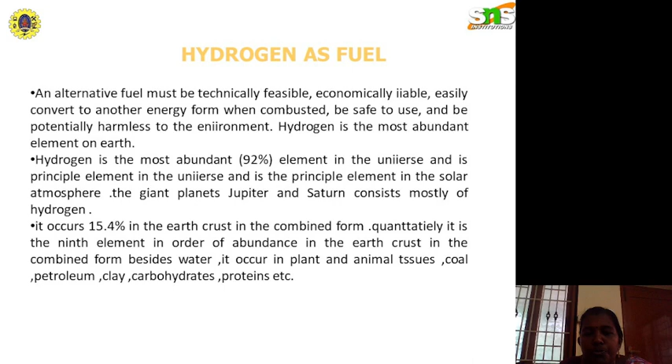An alternative fuel must be technically feasible, easily convert to another energy form when combusted, be safe to use, and be potentially harmless to the environment. Hydrogen is the most abundant element on earth. Hydrogen is the most abundant element in the universe and is the principal element in the solar atmosphere. The giant planets Jupiter and Saturn consist mostly of hydrogen.

The key criteria for an ideal fuel are inexhaustibility, cleanliness, convenience, and independence from foreign control. For the past 40 years, environmentalists and several industrial organizations have promoted hydrogen fuel as the solution to the problems of air pollution and global warming. Similar to electricity, hydrogen is a high quality energy carrier which can be used with a high efficiency and zero or near zero emissions at the point of use.

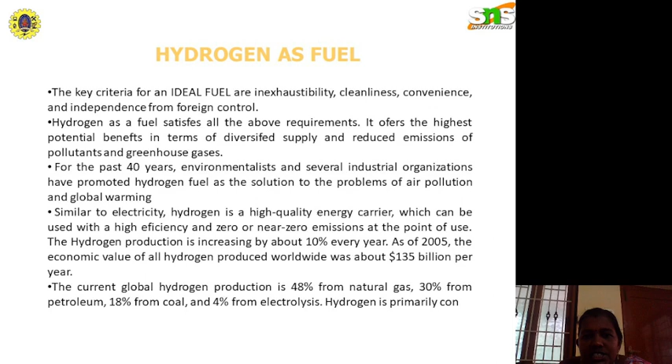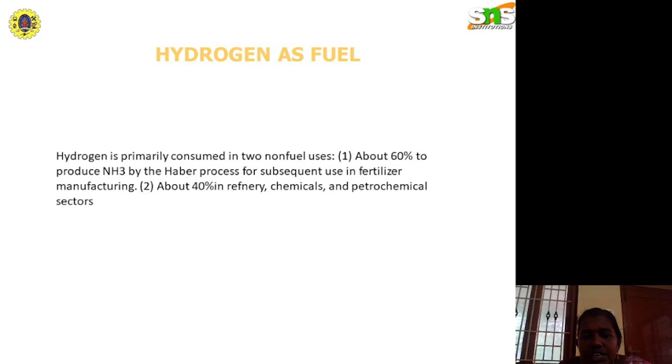Hydrogen production is increasing by about 10% every year. As of 2005, the economic value of all hydrogen produced worldwide was about 135 billion per year. Hydrogen is primarily consumed in two non-fuel uses. The first is about 60% to produce ammonia by the Haber process for subsequent use in fertilizer manufacturing. The second is about 40% in refinery, chemicals and petrochemical sectors.

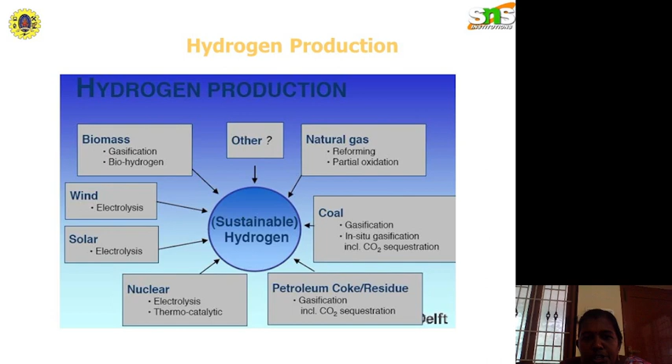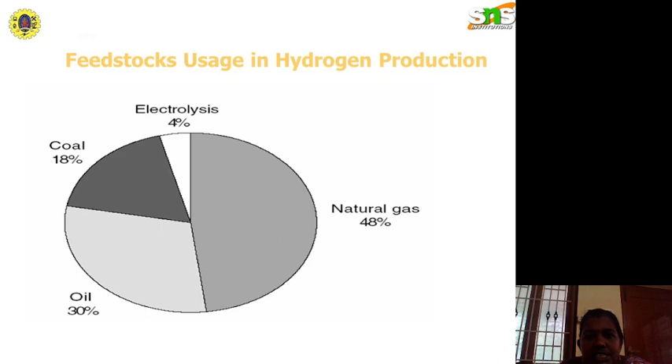This is the schematic diagram for hydrogen production. Sustainable hydrogen: first natural gas, then coal, petroleum, coke residue, nuclear, solar, wind, biomass. Then feedstock usage in hydrogen production: electrolysis 4%, natural gas 48%, coal 18%, oil 30%.

These are the sustainable pathways to hydrogen: renewable energy, heat and biomass. Heat is converted into mechanical energy, mechanical energy into electricity, electricity into the electrolysis process, and the electrolysis process into hydrogen. Similarly, heat undergoes the thermolysis process with the evolution of hydrogen. Then biomass is converted into hydrogen, and photolysis is converted into hydrogen.

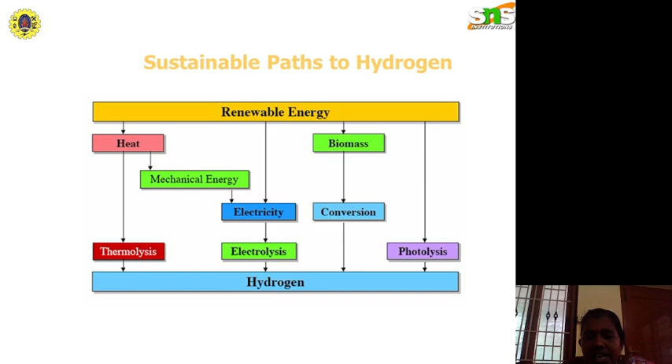Hydrogen production methods. Most methods of producing hydrogen involve splitting water into its component parts of hydrogen and oxygen. The most common method involves steam reforming of methane from natural gas, although there are several other methods. First, steam reforming converts methane. Second, steam electrolysis. Third, thermochemical water splitting uses chemicals and heat in multiple steps to split water into its component parts. Then photoelectrochemical systems use semiconducting materials to split water using only sunlight.

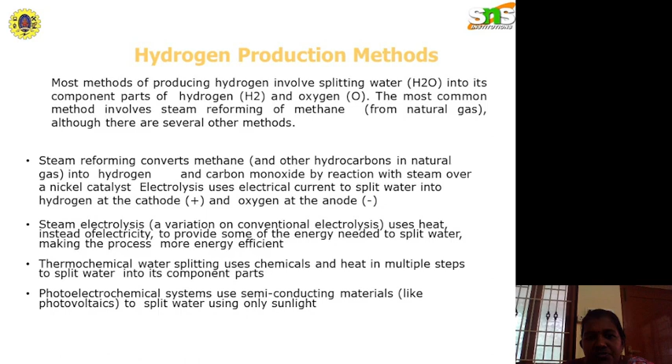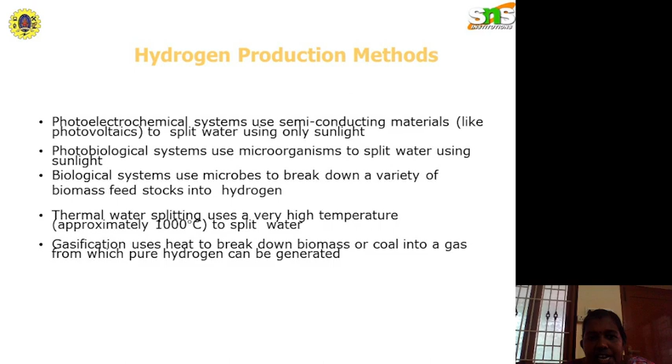Then hydrogen production methods. Photoelectrochemical systems use semiconducting materials to split water using only sunlight. Photobiological systems use microorganisms to split water using sunlight. Biological systems use microbes to break down a variety of biomass feedstocks into hydrogen. Thermal water splitting uses a very high temperature to split water. Then gasification uses heat to break down biomass or coal into a gas from which pure hydrogen can be generated.

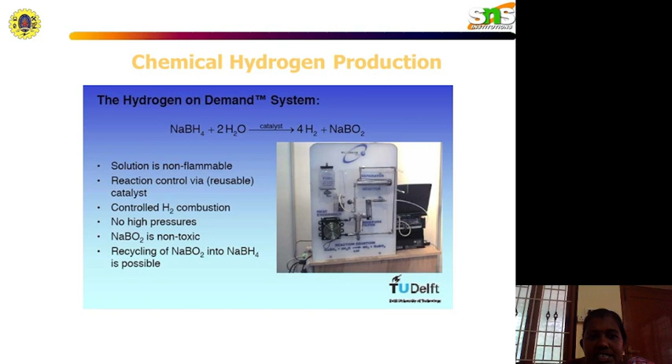Then this is the chemical hydrogen production. Sodium borohydride plus water is converted into hydrogen plus NaBO2. The solution is non-inflammable. Reaction control via reusable catalyst. Controlled hydrogen combustion. No high pressures. NaBO2 is non-toxic. Recycling of NaBO2 into NaBH4 is possible.

Then the electrolysis process. The electrolyte composition is pure water plus 30% potassium hydroxide. The requirements for electrolysis are high purity water and electricity; efficiency is 85 to 90%, and hydrogen purity is greater than 99.9%.

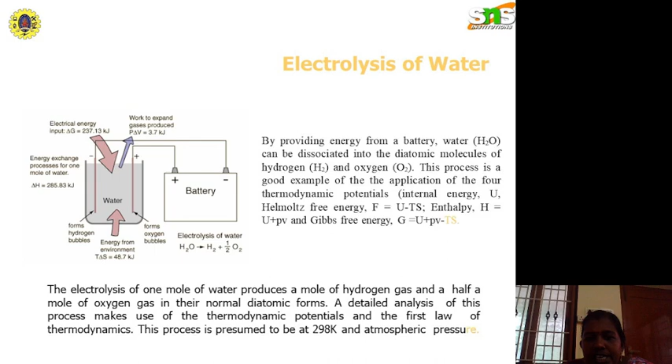Then electrolysis of water. By providing energy from a battery, water can be dissociated into diatomic molecules of hydrogen and oxygen. This process is a good example of the application of the four thermodynamic potentials: internal energy, Helmholtz free energy, enthalpy and Gibbs free energy. The electrolysis of 1 mole of water produces 1 mole of hydrogen gas and half a mole of oxygen gas in their normal diatomic forms. A detailed analysis of this process makes use of the thermodynamic potentials and the first law of thermodynamics. This process is presumed to be at 298 Kelvin and atmospheric pressure.